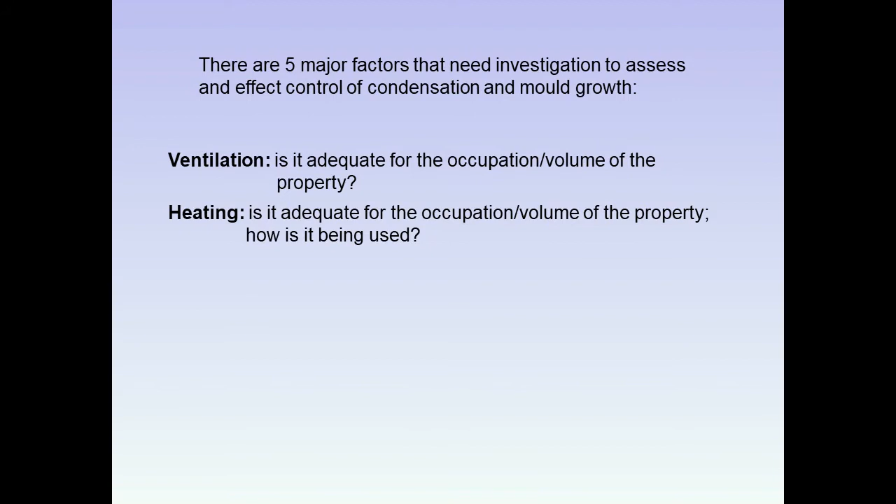Ventilation: is it adequate for the occupation and volume of the property? Similarly, is the heating adequate, and how is it being used? Moisture production: is it reasonable given the variation in lifestyles? Are there possible excesses, for example drying clothes?

Airflow: movement around and behind furniture - is it adequate? Insulation: are there specific cold spots?

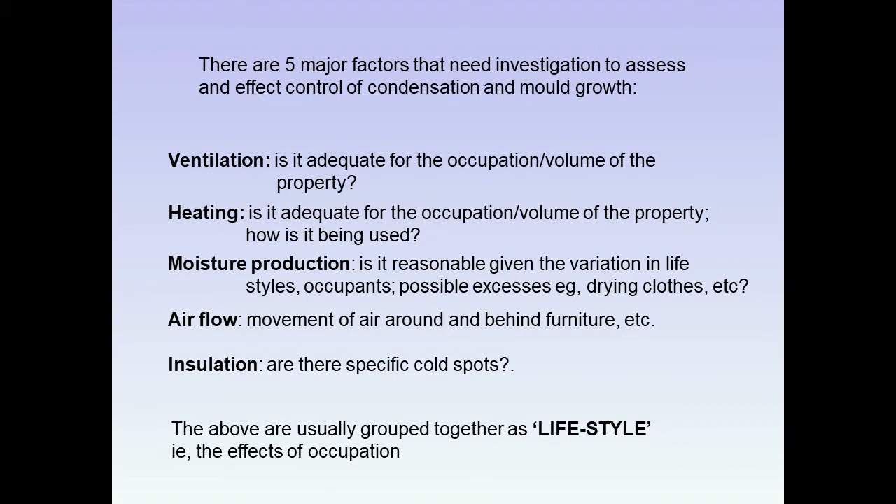The above are usually grouped together, generally, as lifestyle, that is, the effects of occupation. So what is lifestyle? Well, for our purpose, it's water generated by occupation. A domestic property should be able to cope with this, or rather a normal lifestyle, that is, with normally accepted

activities, no overcrowding, no unrealistic moisture generation from bottled gas heaters, drying clothes, etc. And if we look at it, there are 2 extremes of normal lifestyles. Family 1 has cereal for breakfast and salads, tea, etc., with minimal cooking and mostly out all day. Family 2 all have cooked breakfast, fully cooked dinners in the evening, young children, and some occupation all day. The property should be able to cope with both extremes by one means or another, and appropriate systems should be in place to allow this.

The average domestic property is not designed to manage additional extraneous sources of water, such as from paraffin heaters or continual use of unventilated dryers.

So back to control of atmospheric moisture and condensation. Improve ventilation - what are we doing? We are sweeping out moisture-laden air and replacing it with drier air from the outside. In reality, however, we don't totally replace it. We are effectively diluting it with dry air. And this is the theory of ventilation.

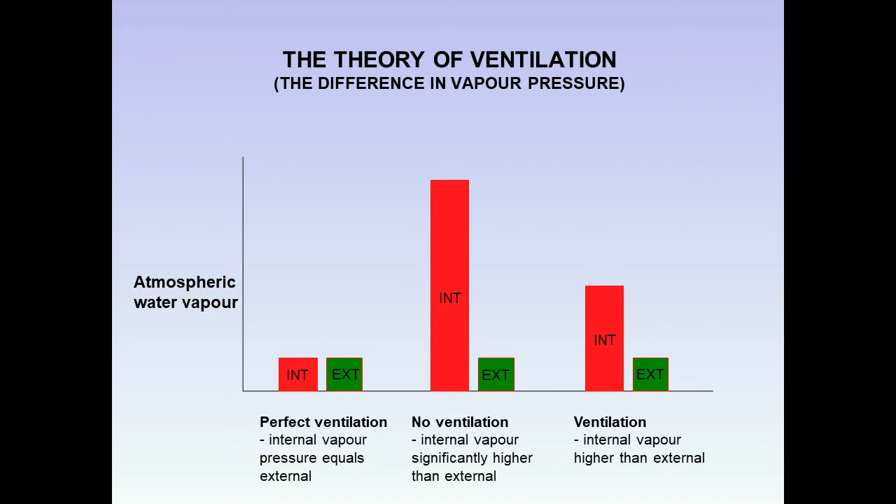Perfect ventilation would throw out all the internal air and replace it with external air, so we'll have the same amount of air outside as inside. With no ventilation, internal vapour is significantly higher than external because it's not being swept out. In reality, we could call it ventilation: internal vapour is higher than the external, but at an acceptable level because it is being diluted and partly thrown out by means of the external air.

Typical ventilation rates as a whole system there from well-sealed dwelling in sheltered position to leaky dwelling in exposed position, and they're from BS 5250.

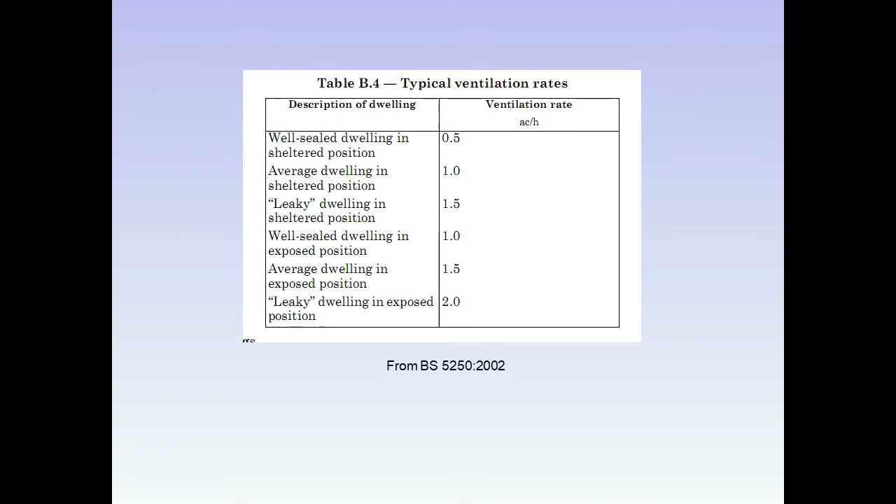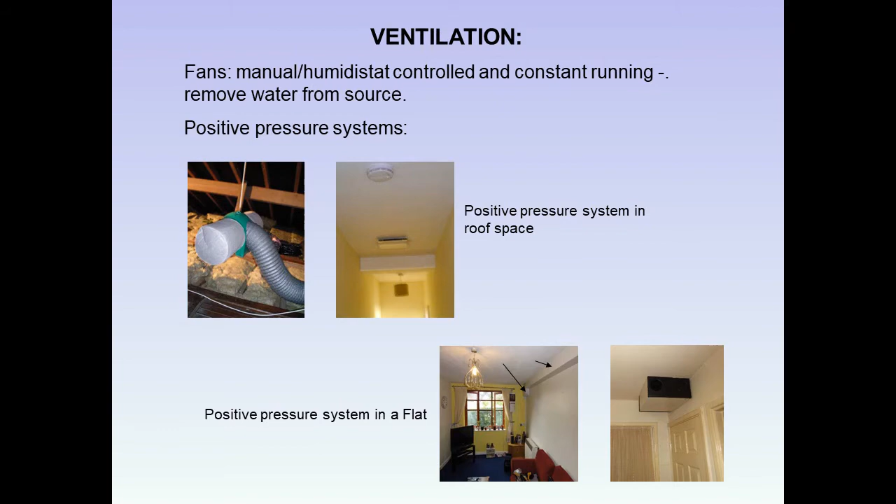So the positive pressure unit then sets up a positive pressure internally, bringing in the drier air from the outside via the eaves, and this pushes out the damp air in the building as a whole. Constant running fans, such as ones used in a bathroom and kitchen, these are designed to suck out the damp air or push out the damp air, and it's replaced with drier air from other parts, including the outside, because a negative pressure is set up and the dry air moves in.

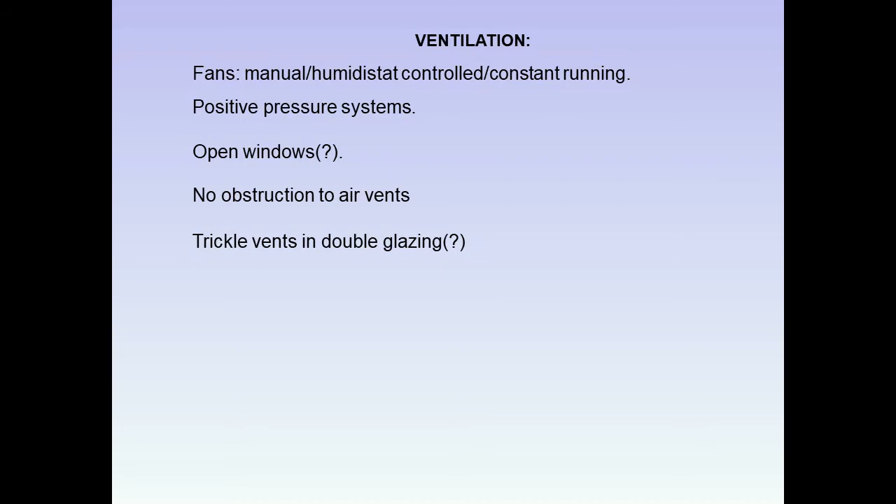Open windows, not too easily if you live in a ground floor flat, say in a city, but it works. No obstruction to air vents. Trickle vents in double glazing on their own probably do very little, but with other systems such as fans and PPUs, excellent. Given that major areas of water generation are bathrooms and kitchens, it really is important to remove that water at source.

Reducing subfloor condensation: well, first of all, reduce internal moisture levels, because such moisture with a higher vapour pressure will pass beneath the floor where it's colder. We should maintain good airflow, and if we have a damp oversite, then we can put polythene over it to slow down evaporation.

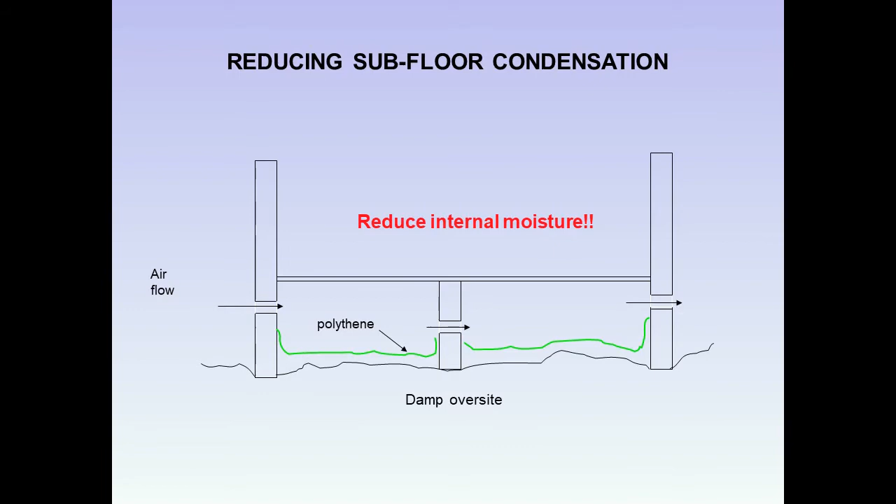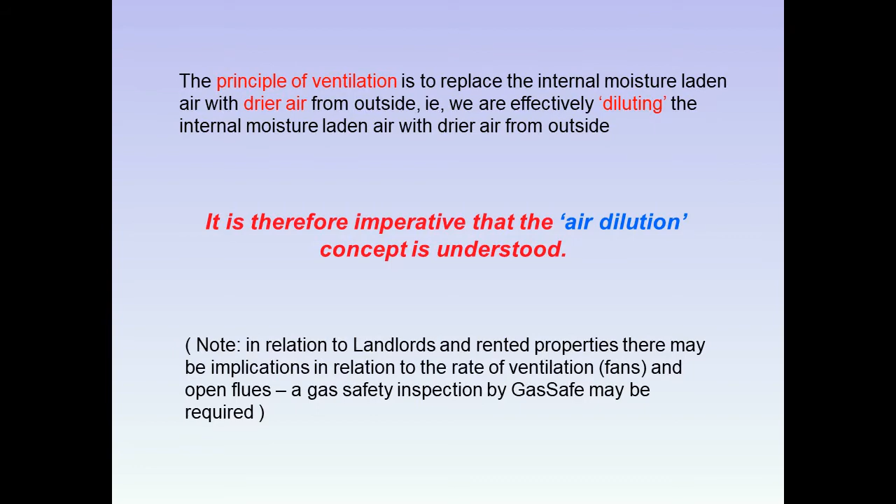I mentioned it earlier, but the principle of ventilation is to replace the internal moisture-laden air with drier air from the outside. In other words, we're diluting the internal air with dry air. It's therefore imperative that the air dilution concept is fully understood. There are, however, in relation to landlords and rented properties, implications in relation to the rate of ventilation, mostly with fans and open flues, and a gas safety inspection by GasSafe may be required.

Improve heating, make it constant, not intermittent. This has other advantages of raising the temperature of surfaces of walls, etc., and lowering the humidity in general, therefore lowering the risk of condensation and mould growth. In reality, ventilation and heat are basically controllable factors and should be the first items assessed, and if possible installed or improved.

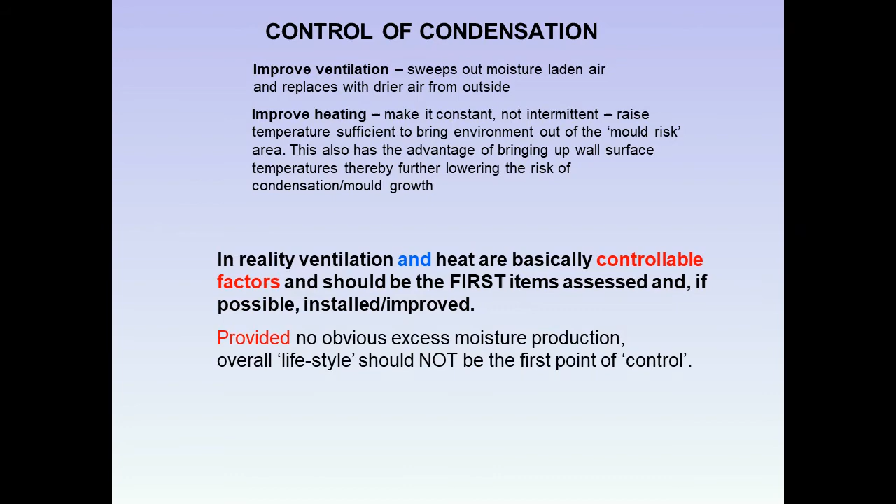Provided there's no obvious excess moisture production, lifestyle overall - namely putting lids on pots and pans and other items - should not be the first point of control.

One should therefore keep the relative humidity in a domestic property below an average of around 60% at 20 degrees. This should be the same for any property, irrespective of size, under what we could regard as normal occupation. If we cannot achieve this average, then one needs to investigate why.

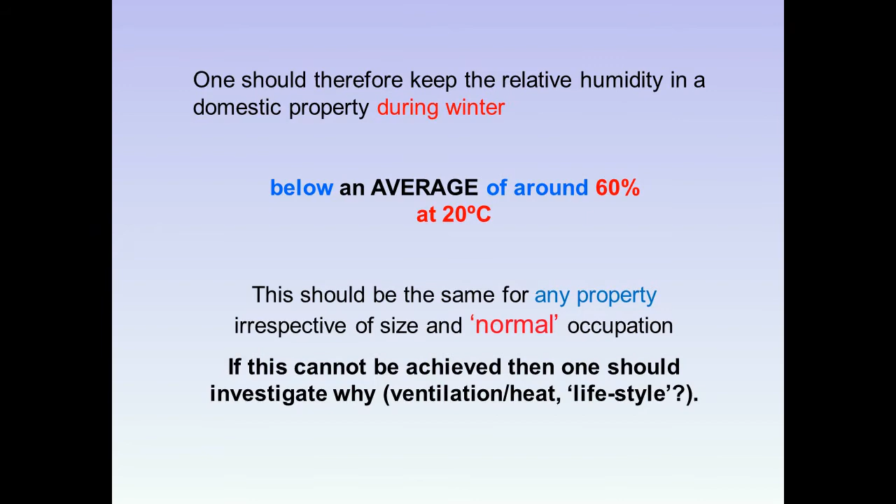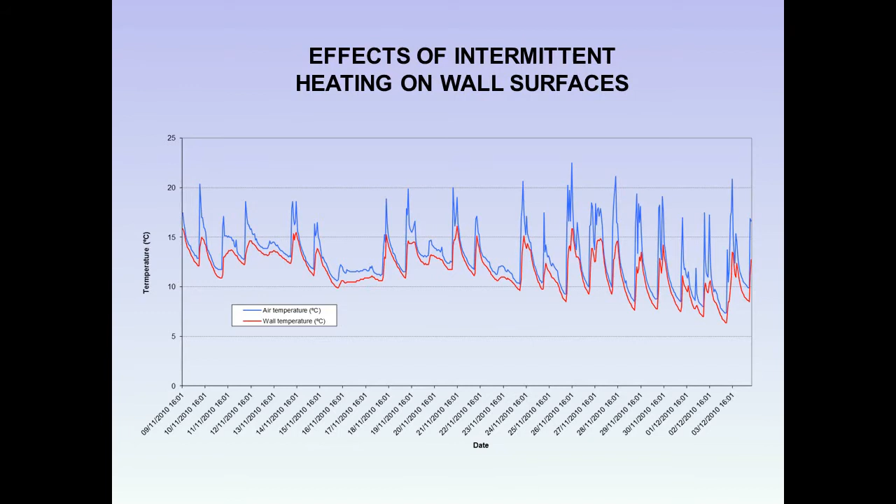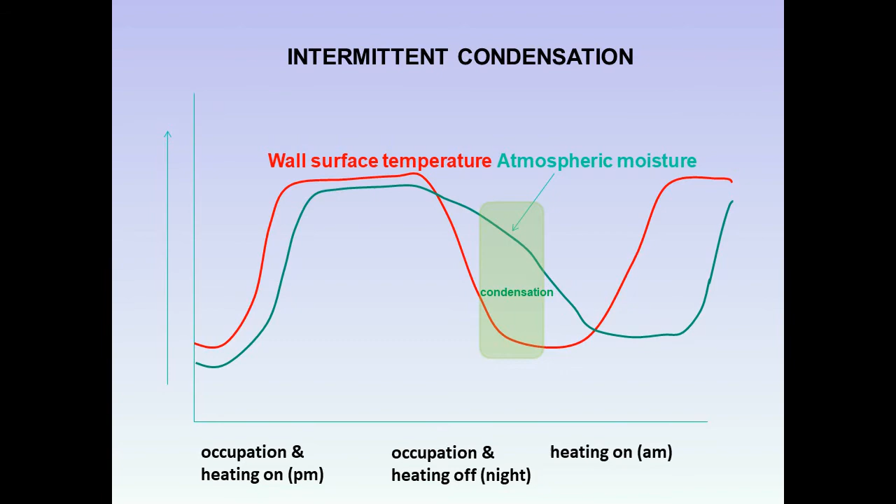Ventilation, heat, lifestyle - for example, drying clothes over radiators. We saw this earlier, the effects of heating on wall surfaces, especially intermittent heating, but it does show that wall surfaces do heat up very quickly and therefore lower the relative humidity of any air in the boundary layer against that wall. We saw how condensation can occur at various times, well beyond the times we expect it - not during the day, but perhaps during the early morning.

Reduce sources of moisture. Don't use bottled gas heaters, etc. Don't dry clothes over radiators or use unventilated dryers. This activity can overload even the most efficient ventilation and heat systems.

Improve surface temperatures - we can insulate. Improve the thermal properties of walls, keep them dry. If one gets water penetration into a wall, not necessarily through it, then that lowers the thermal property. If we can stop that, say by an external silicone coating, then the thermal property of the wall will improve.

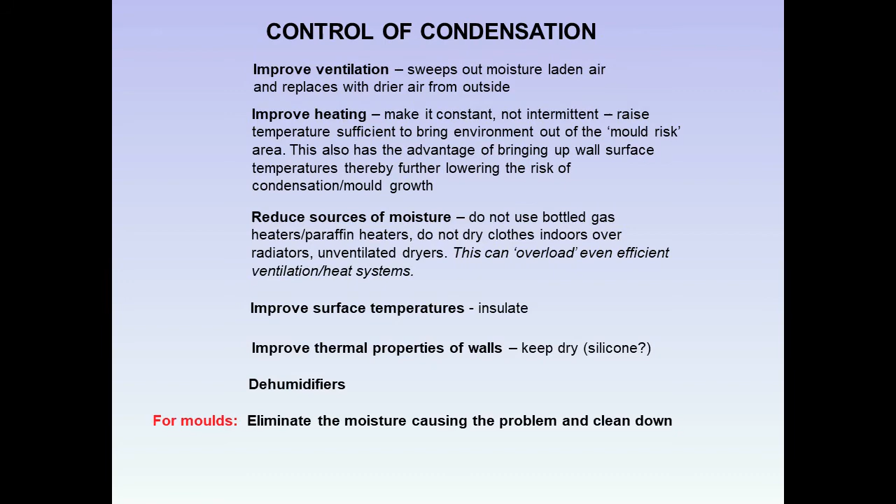Dehumidifiers are good. However, for moulds, we need to eliminate the moisture causing the problem, and this is followed by...

But it should be fully appreciated that the risk of indoor air quality problems leading to these organisms is greater in a distinctly damp internal environment than a dry one. It therefore becomes imperative that nobody should persistently occupy a damp internal environment, and it is essential to get the building back into a suitably dry, clean state.

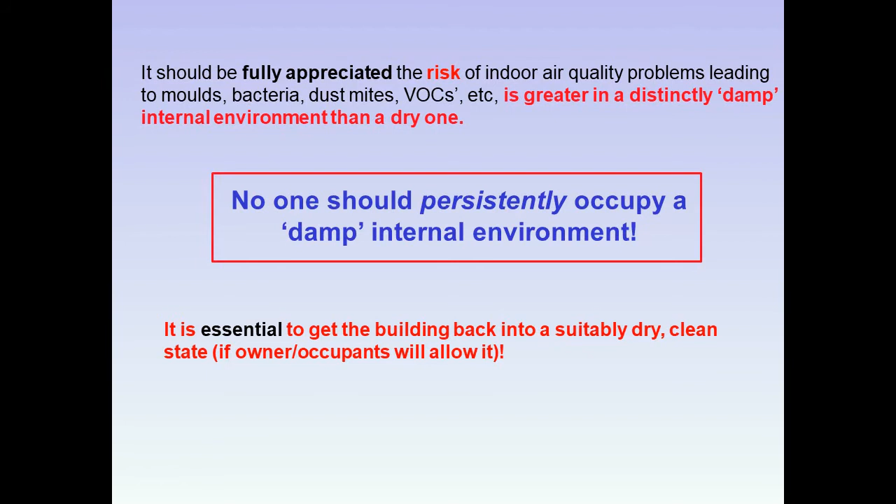So let's go back again. For the average domestic environment, we have mould. But do you need to require a mould expert when it's found? No. If you can recognise a mouldy orange, you can recognise mould anywhere. You are now a mould expert.

So what would you do if you found mould? Would you go and take samples, get them analysed? Indeed, if these were allegedly innocuous, would you leave it? The answer is no. You don't change your corrective procedures based on the species of mould. The cause is the same - water. And this cause is irrespective of the mould type.

Control the water, that is the fix. It's impossible to eliminate all mould and mould spores in the indoor environment, and similarly, visible mould, although not a precise measure of exposure, is probably the clearest risk indicator for potential exposure.

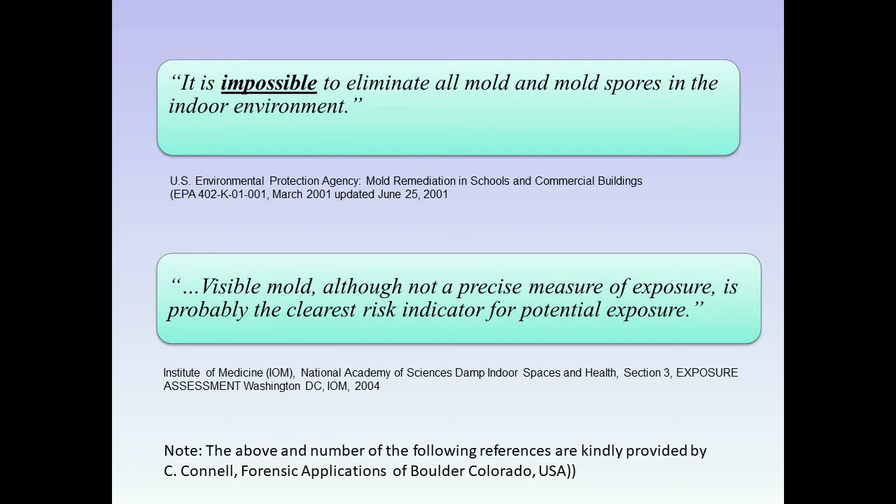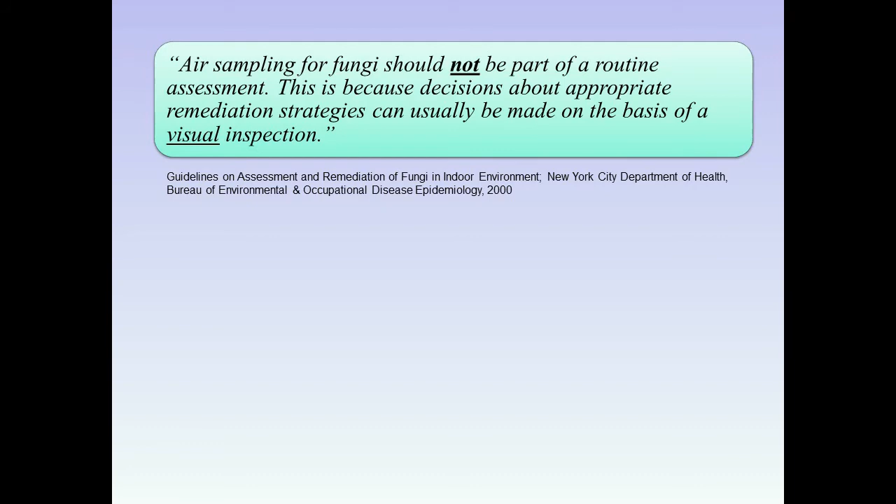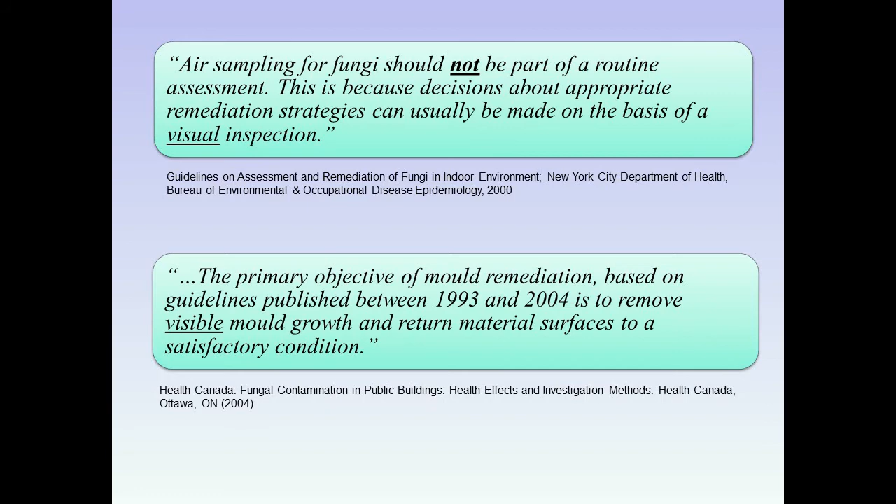Air sampling for fungi should not be part of a routine assessment. Decisions can be made about remediation based on a visual inspection. Furthermore, it is only a snapshot, as we'll see in a minute. The primary objective, based on guidelines published between 1993 and 2004, is to remove visible mould growth and return material surfaces to a satisfactory condition.

Finding hidden mould is difficult and expensive. There are, however, odd occasions where one may have to look for it.

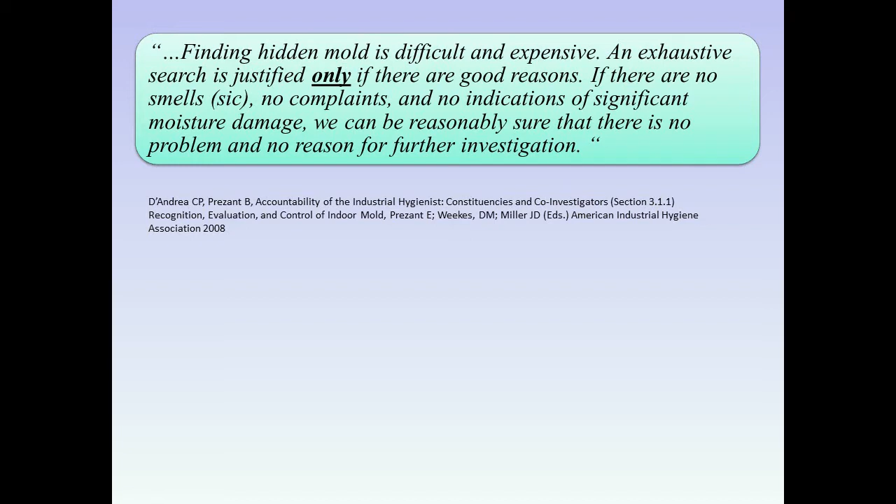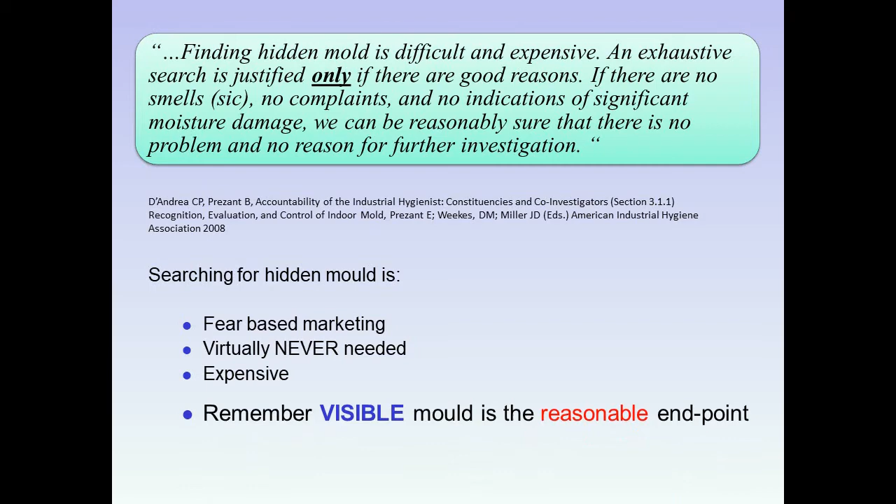Searching for hidden mould is fear-based marketing, virtually never needed, and expensive. Remember, visible mould is the reasonable endpoint.

Going back to air sampling, this shows the inherent variability in air sampling for moulds. You get massive variations in very short time periods, even using the same traps positioned in opposite directions. So these massive changes can take place over very short periods of time.

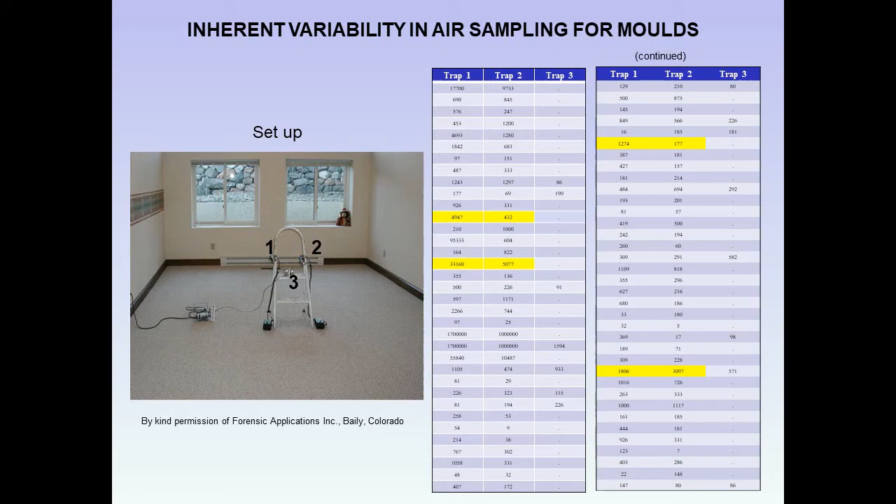Therefore, we are only reading a snapshot of what is going on. There will be a large difference, for example, between sampling while somebody's walking in the room and sampling possibly with all the windows open half an hour later. Sampling for moulds is almost irrelevant. These figures, by the way, are by kind permission of Forensic Applications in Bailey, Colorado.

So what do we do? Well, the aim is to keep a reasonably low relative humidity, that is below about 80%. This avoids the development of mould growth.

Remediation of the conditions that lead to adverse exposure should be given priority, as identified in the World Health Organization, 2009.

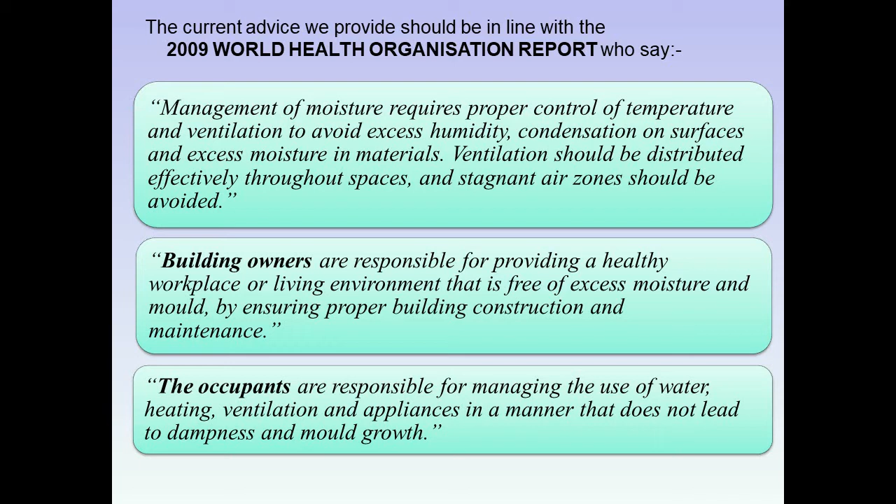Very importantly, building owners are responsible for providing a healthy workplace or living environment that is free of excess moisture and mould by ensuring proper building construction and maintenance. The occupants are responsible for managing the use of water, heating, ventilation and appliances in a manner that does not lead to dampness and mould growth. Therefore, it splits the responsibility between the landlord effectively and the occupants.

Visual and olfactory inspection is the most important step. Cleaning up is complete when there is no visible mould, there are no mouldy odours, and, very important, you have fixed the moisture and water problem so that it will not recur.

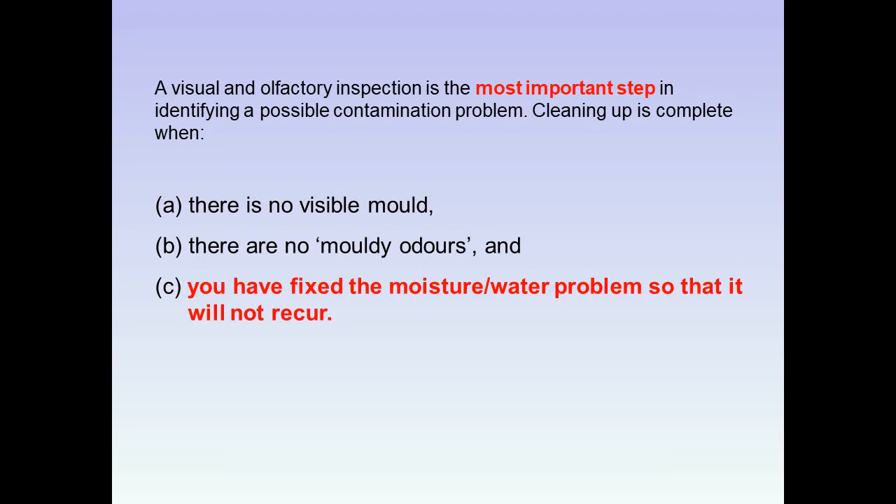Again, a repeated theme: the most practical approach is simply to eliminate all visible mould growths and smells from the environment.

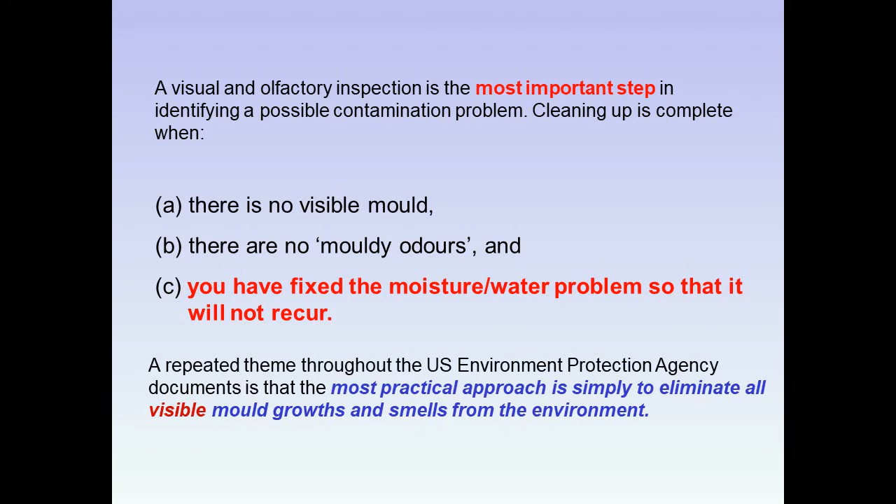Considering cleanup, if moulds are found in a building, prudent practice recommends that visible mould be removed. It is very unlikely that hidden mould poses a problem. Use the simplest and most expedient method that properly and safely removes mould.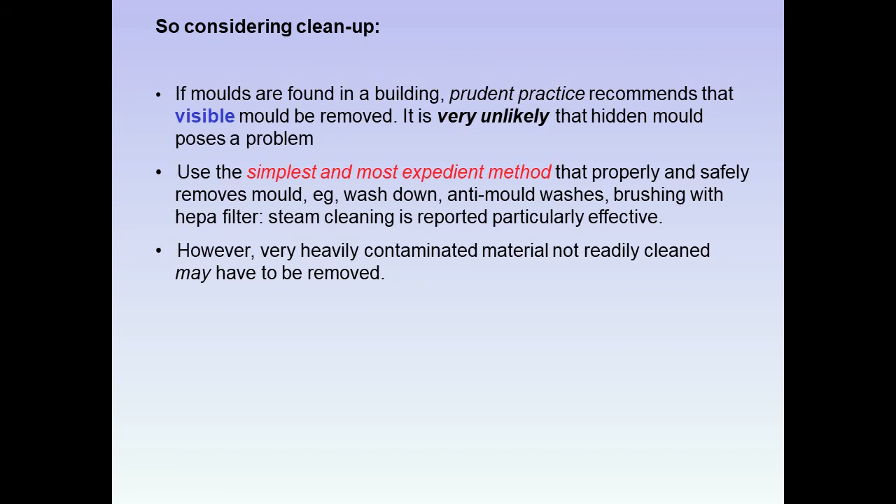Wash down, anti-mould washes, brushing with HEPA filter, and indeed steam cleaning is reported as particularly effective. However, very heavily contaminated material may not be readily cleaned and may have to be removed.

Please note that if there is a significant amount of mould present, if it is positively known that occupants have distinct medical conditions which could potentially compromise their health, then speedy clean-up using appropriate control protocols should be put in place.

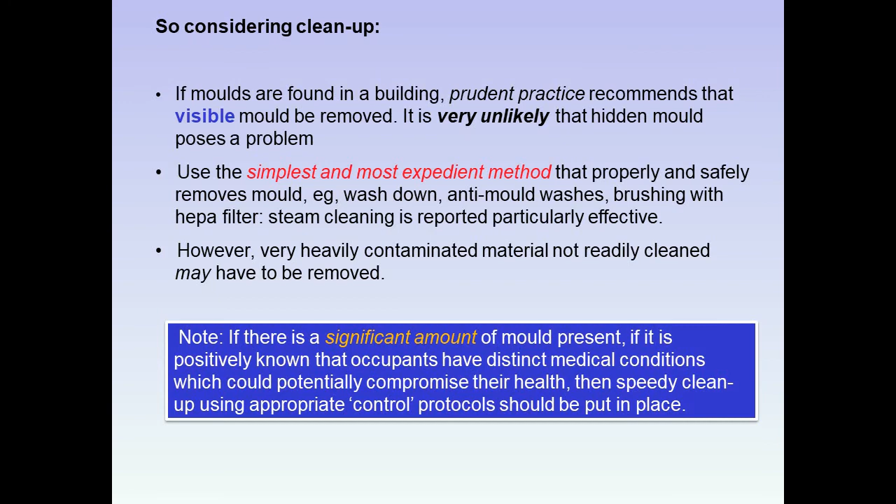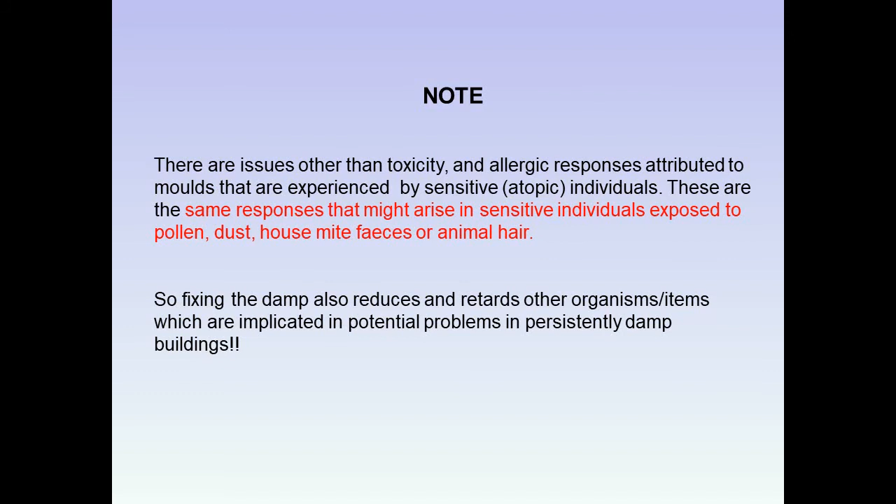There are issues other than toxicity and allergic responses attributed to mould that are experienced by atopic individuals. These are frequently the same responses that might arise in a sensitive individual exposed to pollen, dust, house mite feces, or animal hair. So it is therefore important that fixing the damp reduces and retards other organisms or items which are implicated in potential problems in persistently damp buildings.

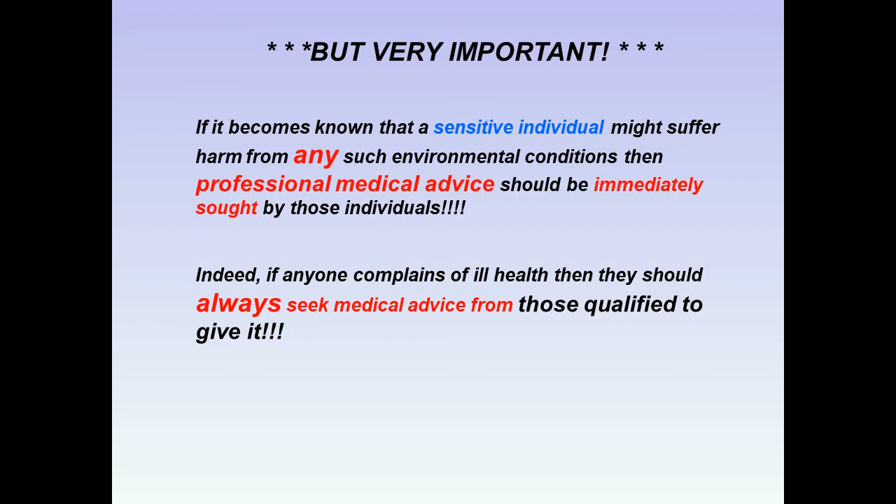It is extremely important that if it becomes known that a sensitive individual might suffer harm from any such environmental conditions, then professional medical advice should be immediately sought by those individuals. Indeed, if anyone complains of ill health, they should always seek medical advice from those qualified.

And finally, no one without a medical degree should offer opinions on the health of patients, and no practicing physician should assume a cause and effect from the limited data available on one patient or even a group.

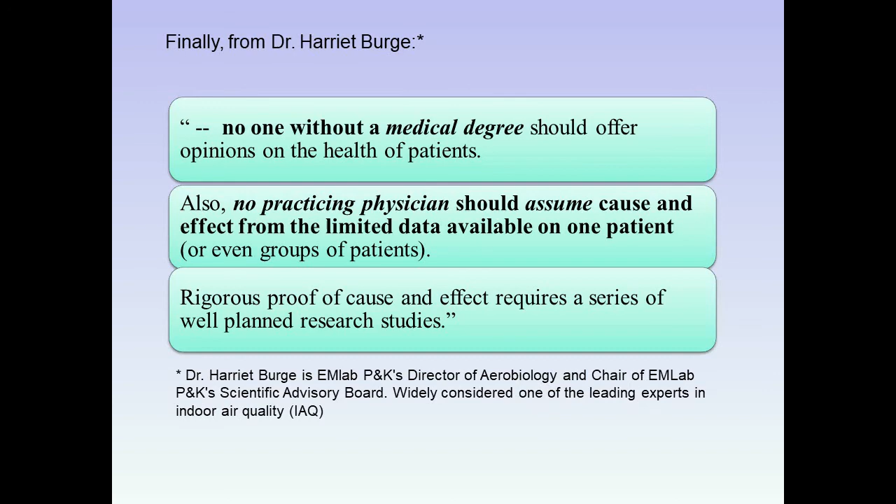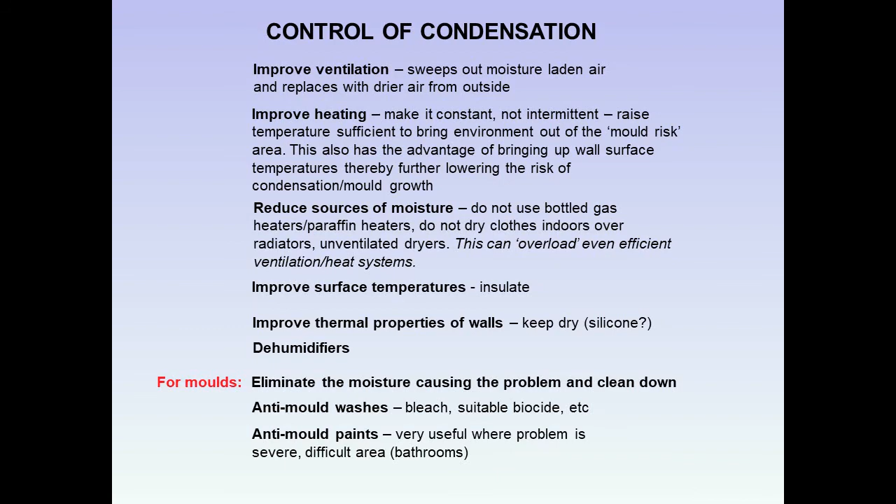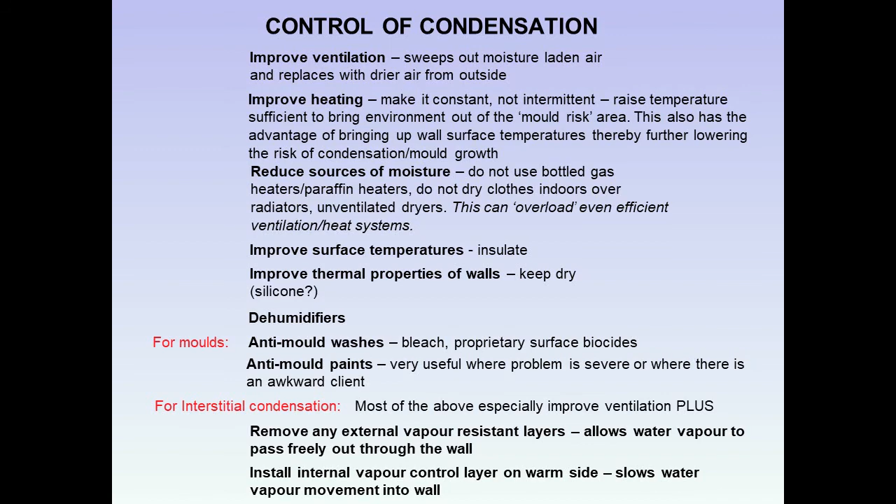For interstitial condensation, most of the above applies, but especially improve ventilation, plus remove any external vapor-resistant layers. This will allow water vapor to pass freely out through the wall. And install an internal vapor control layer on the warm side. This slows the water vapor into the wall, thus reducing the risk of interstitial condensation.